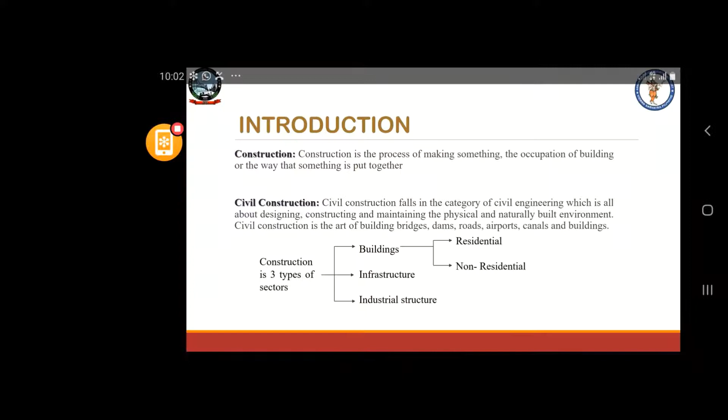Welcome to today's presentation on new trends in construction planning as well as technologies. My presentation is focusing completely on the technologies involved in construction, in the existing as well as future technologies.

Construction, as we know the definition, is the process of making something, the occupation of building, or the way something is put together. Majorly, civil construction includes the category of civil engineering, which is all about designing, constructing, and maintaining the physical and naturally built environment.

Construction is the art of building bridges, dams, roads, airports, canals, as well as buildings. Civil construction is three types of sectors, which includes buildings, infrastructure, industrial structures.

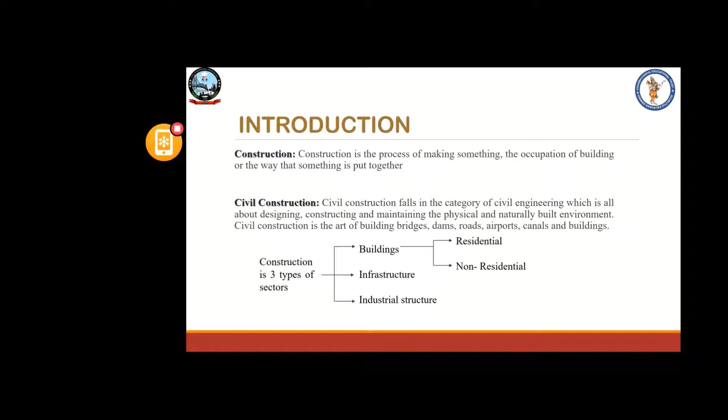Again, the buildings are subclassified as residential and non-residential constructions. It is also subclassified as residential buildings, light commercial construction, multi-family construction, that is apartment culture, healthcare construction, environmental constructions, industrial constructions, institutional construction, infrastructure project constructions, including roads, bridges, canals, highways.

The construction technology is basically defined as the study on methods of construction to successfully achieve the engineering design with recommended specifications. It also includes study of construction equipments and temporary works required to facilitate the construction process.

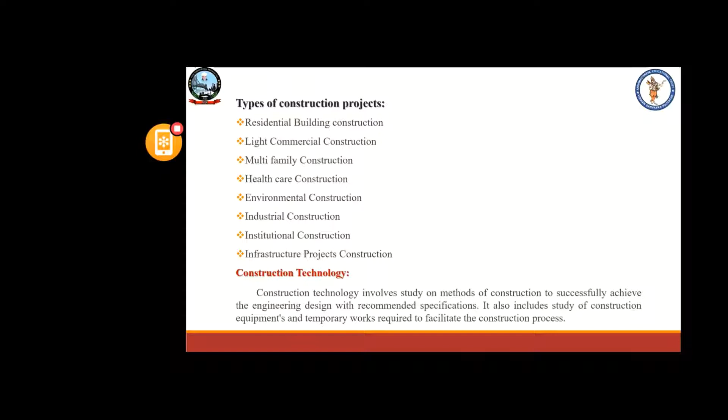See the history of construction technology. The Neolithic construction stage, that is New Stone Age, which is roughly from 9000 BC to 5000 BC, before Christ. The tools available were made from natural materials including bones, stones, wood, animal fibers, and the use of water. The first buildings were shelters, tents, and huts. It's built self-sufficiently using locally available materials, which has happened in the Stone Age, that is Neolithic construction.

Next stage is the Copper Age and Bronze Age, which came into use before 5000 BC, and bronze around 3100 BC. Although the times vary by region, copper and bronze were used for the same types of tools as stones such as axes, chisels, but new, less brittle, more durable materials.

Next stage is Iron Age construction, which is during 1200 BC to 50 BC, with the widespread use of iron for tools and weapons. In this period, by adding carbon, iron became steel, which was being produced after 300 BC. Steel can be hardened and tempered, producing a sharp, durable, cutting-edge technology.

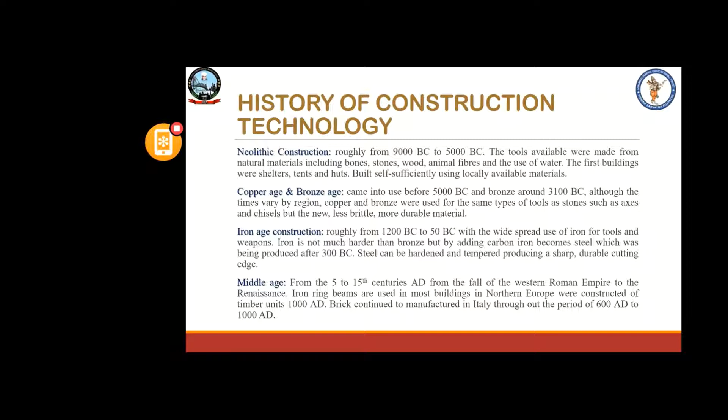Next, the Middle Ages, which is from 5th to 15th century AD, after the death of Christ. From the fall of the Western Roman Empire to the Renaissance, iron ring beams are used in most buildings. In Northern Europe, buildings were constructed of timber units until 1000 AD. Brick continued to be manufactured in Italy throughout the period of 600 AD to 1000.

The Renaissance stage started in Italy. The inventions of movable type and the reformations are taken. In the 17th century, that is called the birth of modern science. However, it was not until the 18th century that engineering theory developed sufficiently. Up to that, it was not professionally developed.

In the 18th century, it saw the development of many ideas that had been born. The architect and engineer became increasingly professionalized. Whereas in the 19th century, the Industrial Revolution took place. The Industrial Revolution was manifested in new kinds of transportation installations such as railways, canals, and macadam roads.

In the 20th century, elevators and cranes made high-rise buildings and skyscrapers possible. Other new technologies were prefabricated construction and computer-aided design. Whereas at the end of the 20th century, ecology, energy conservation, and sustainable development have become more important issues of construction.

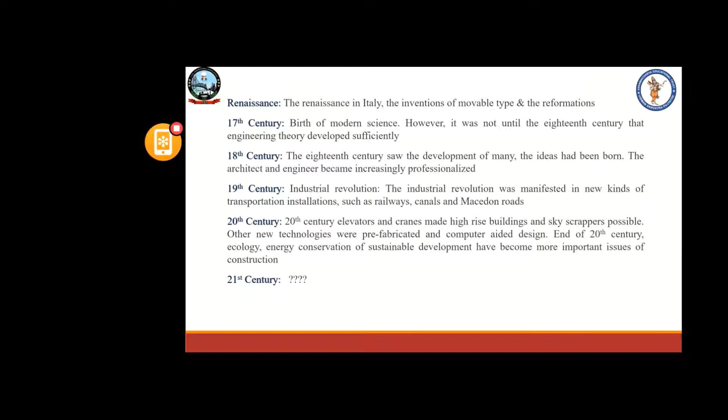The perspective on our construction industry in the 21st century, how are we doing, where are we? We are not up to the mark because when a project is sanctioned within a duration of 1 year, we are unable to complete it within 1 year. It is taking more than 1 year, it may go to 2 years or 3 years. There is a loss on the investor side as well as contractor side. The cost will be day by day increasing. So to arrest all these things, we have to see the alternatives, that is alternative technologies and emerging technologies.

And also you see the problems in the industry. The future state of our industry, how much we change to get there, and the role of innovation and new technology.

Why is construction very important? As all of you know, it is one of the first businesses. Virtually all other businesses rely on construction. People spend 90% of their time indoors, which has major impacts on health and well-being.

The total annual revenue is $10 trillion, whereas the added value is $3.6 trillion.

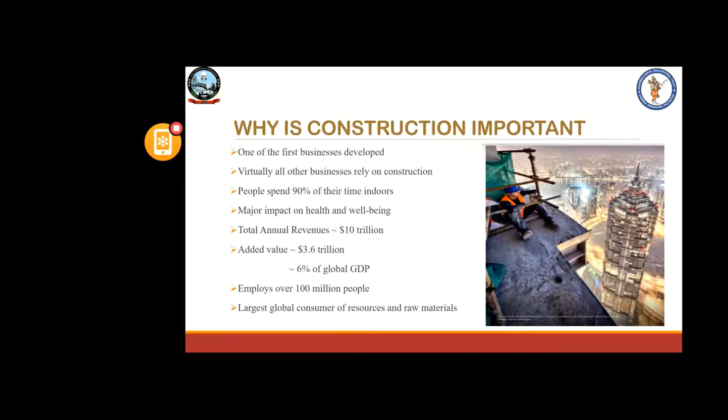The populations of urban areas are increasing by 2 lakhs people per day, so we'll need housing as well as infrastructure to accommodate this population. Our industry must transform, but our country is challenged.

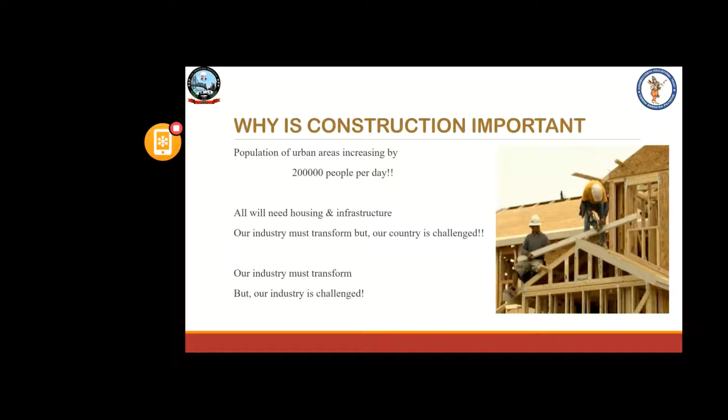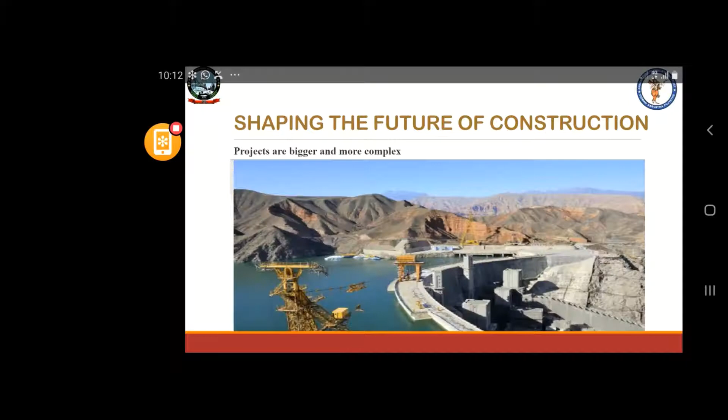Shaping the future of construction, the projects are bigger and more complex.

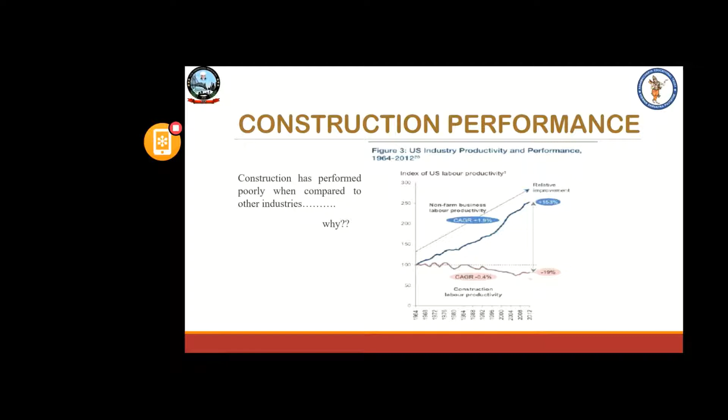Canada ranks among the top 10 countries in health and primary education, labor market efficiency, and financial market. The construction performance has also performed poorly when compared to other industries.

There are internal challenges. The industry must also confront internal challenges, which are lack of innovation and delayed adoption, informal process or insufficient rigor, and consistency in process execution.

Insufficient knowledge transfer from project to project, weak project monitoring, little cross-functional cooperation, little collaboration with suppliers, conservative company culture, and shortage of young talent and people development.

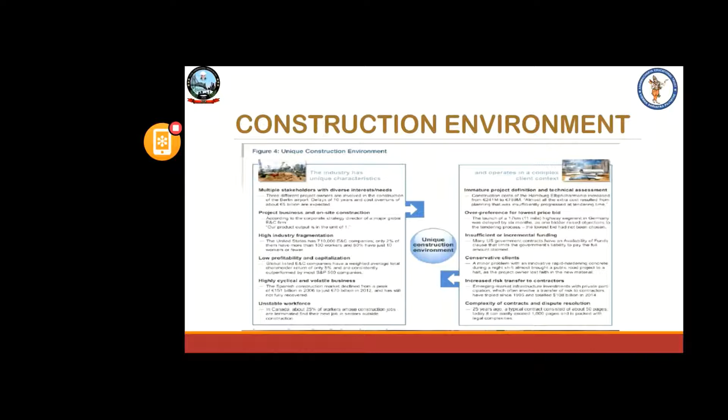So the construction environment includes a unique construction environment. The knowledge should be transferred from project to project.

How can we transform our industry? The transformation framework can include technological materials and tools, which is advanced building and finishing materials, smart materials - life cycle assessment should be increased.

The strategy and business model innovation, industry collaboration, process and operation, people organization and culture, joint industry marketing.

The transformation framework will also take place through regulation and policies, which are harmonized building codes or standards and efficient permit processes, and market openness to international firms and SMEs.

Promotion and funding of R&D, technology adoption and education. It also includes public procurement, actively managed and staged project pipelines with reliable funding,

strict implementation of transparency and anti-corruption standards, innovation-friendly whole life cycle procurements.

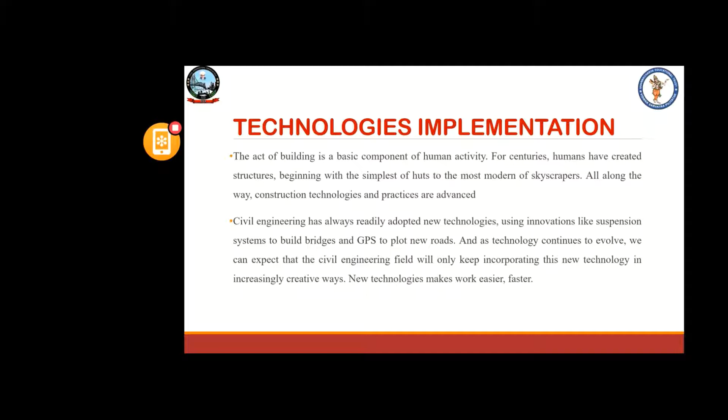The scope of these new technologies, these techniques, is sustainable with a wide range of applications, consumes very less time, and is durable. All these techniques involve use of alternative energy sources which are renewable, ease the construction work, and there is a lot of scope for the future. These techniques also use recycled materials to create new things, and can be used in places where humans cannot access, like dangerous places which are hazardous without man supervision.

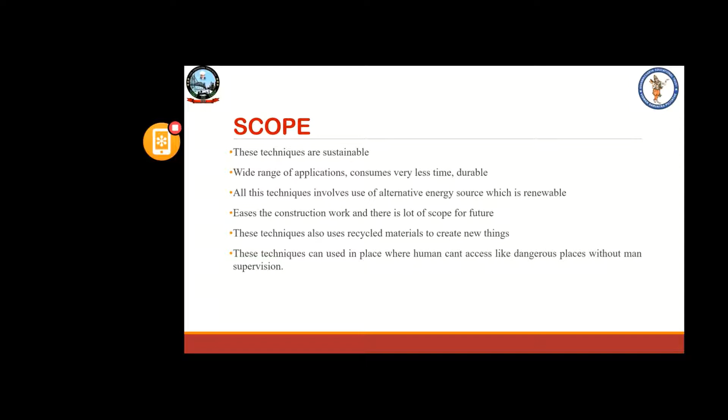The technologies include drones, which are UAVs, unmanned aerial vehicles. Civil engineering is ripe with applications for UAVs which can aid in scanning and mapping work sites, as well as capturing photos and videos for promotional purposes. This creates advanced mapping and scanning capacities for more accurate visualization.

UAVs often represent a cost-saving measure for businesses that need aerial mapping, as a drone does not require any pilot, but rather a programmer. UAVs are also easy to program to fly multiple times around the same work site, which means in the future firms will be able to capture a variety of images and videos while the project is being completed.

This will enable firms to better manage project progress. These UAVs will also revolutionize civil engineering through the use of photo scanning, an image capture process that uses photos rather than lasers to capture images. Photo scanning captures not just the ground surface, but also buildings, plants, branches, benches, and other nearby structures, and represents them in three-dimensional mode. With these advanced capabilities, drones will allow for more accurate and interactive 3D representation of civil engineering projects.

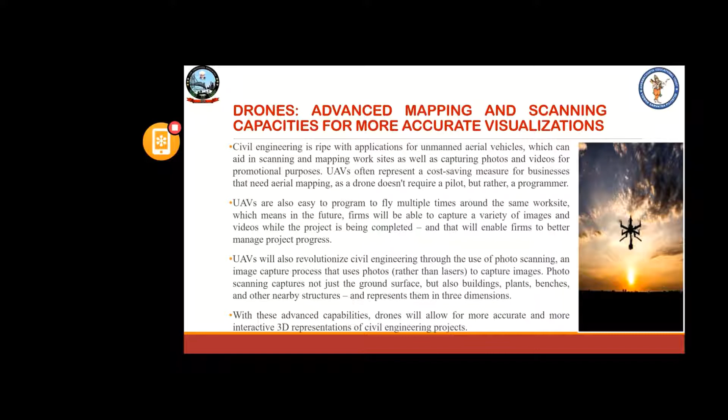Even with the trends of drones and robots, the UAV industry continues to grow. The FAA, the Federal Aviation Administration, a USA organization, predicts that 7 million drones will be required by 2020, for commercial applications in construction, earthworks management, location validation, project management, etc. New collaborations are also taking place.

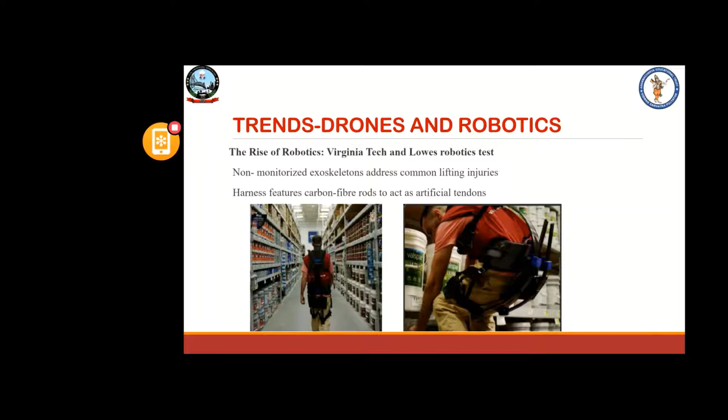The rise of robotics: Virginia Tech and Lowes robotics developed a non-motorized exoskeleton to address common lifting injuries. The harness features carbon fiber rods to act as artificial tendons, which can be used for this purpose.

A few more trends are in augmented and virtual reality. It's necessary to clarify the difference: virtual reality is an immersive experience, whereas augmented reality is information overlaid onto real-time visuals.

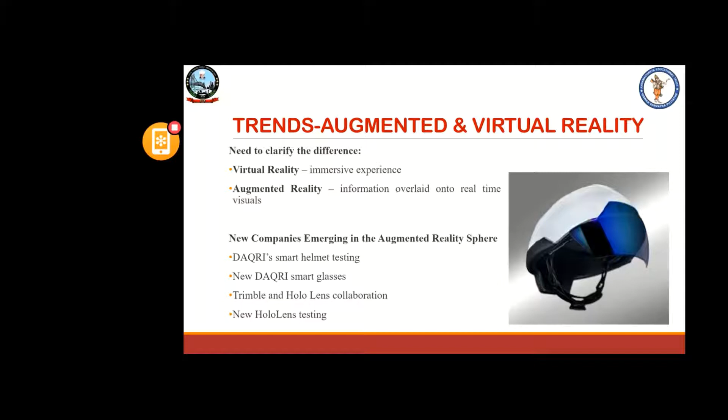Smart elements like smart glasses are manufactured by DAQRI, an American augmented reality company, for the safety of workers in the construction sector. The DAQRI smart helmet is being tested, along with glasses that can visualize virtual reality and augmented reality for employees. Microsoft HoloLens is another trend in augmented and virtual reality, also used for the safety of the worker and to visualize information.

Sensors are also an emerging technology for the health and safety of workers. A Life Band sends a signal through a mobile application if signs of mental fatigue are shown, by measuring brain activity. When a person is working, if any problem or fatigue occurs, it will immediately give an alarm through the sensors.

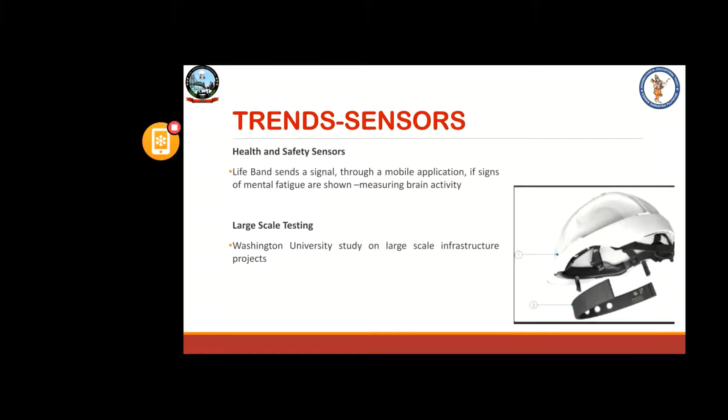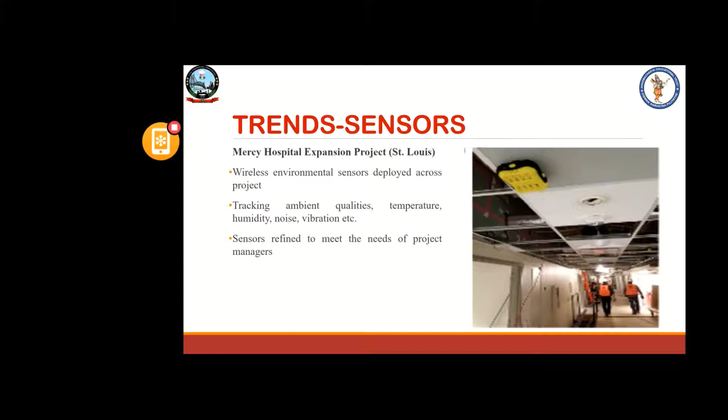Large scale testing, such as the Washington University study on large scale infrastructure projects, is where sensors are deployed, as you can see in this picture. Wireless environmental sensors are deployed across projects, tracking ambient quality such as temperature, humidity, noise, vibration, etc.

Safety sensors are also being used, with tracking technologies unveiling belt-mounted sensors to log workers' movement. Accelerometers and gyroscopes detect sudden falls or movement.

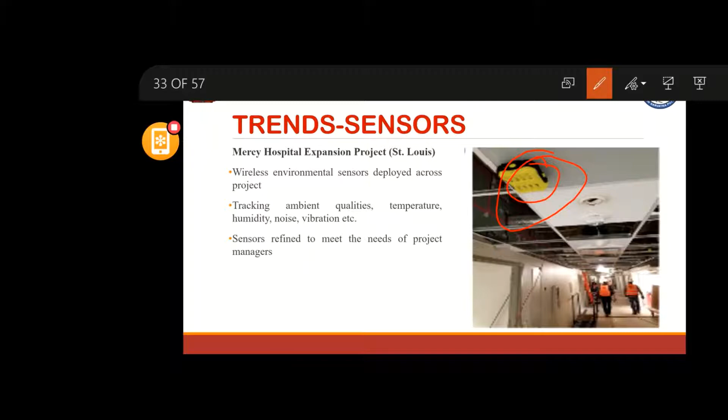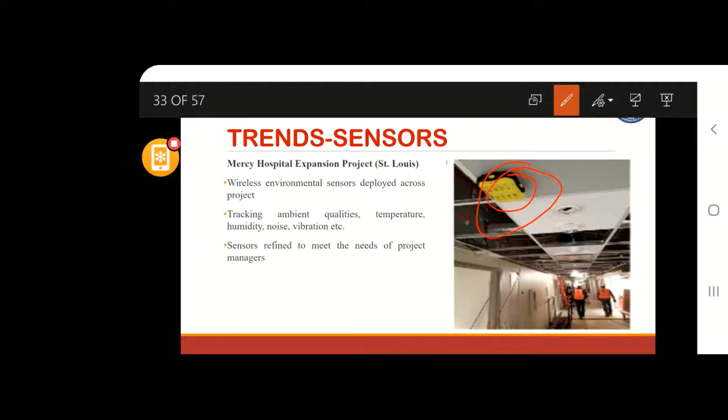You can see here this technology shown at Microsoft Build 2017, where sensors are used. When fatigue or any problem happens in the workplace, it immediately gives an alarm, providing a response to the people, which should also reach the managers.

Robot swarm construction can also be seen here. Termites can build large structures despite having no central supervision. Getting inspiration from this, researchers at Harvard University developed an initial design. Four-wheeled robots can build brick-like walls by lifting each brick and laying them in the required position, and they have sensors to sense other robots so they won't collide with each other.

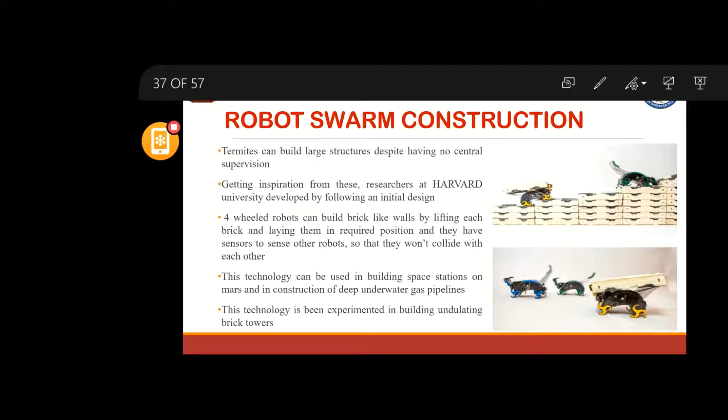This technology can be used in building space stations on the Mars planet and in construction of deep underwater gas pipelines. This technology is also being experimented with in building undulating brick towers.

One more technology is carbon nanotubes. A nanometer is one billionth of a meter. Using cutting edge techniques like electron beam spectrographic methods, engineers have created tubes of carbon with walls 1 nanometer thick. They have the highest strength-to-weight ratio of any material on earth and can be stretched to a million times longer than their thickness.

They are very light and strong, so they can be embedded into other building materials like metals, concrete, wood, and glass. This increases tensile strength also. A lot of research work is going on in monitoring stresses inside building materials and identifying potential fractures and cracks before they occur.

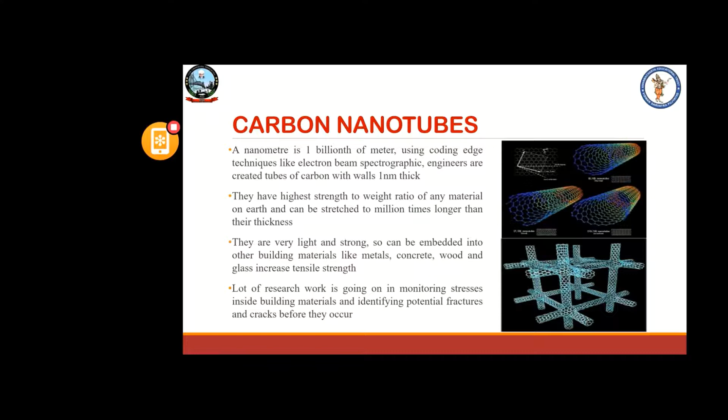The innovative construction material, which is self-healing concrete.

Concrete is the most widely used material on earth, second most used after water. But it is subjected to cracking, stresses, and deterioration under extreme heat and cold conditions. The only way to fix concrete was to patch it or reinforce it.

But in 2010, a graduate student and professor at Rhode Island created a new type of smart concrete that heals its own cracks. The concrete mix is embedded with tiny capsules of sodium silicate. When a crack forms, the capsules rupture and release a gel-like healing agent that hardens to fill the voids. Other researchers have used bacteria or embedded glass capillaries or polymer microcapsules to achieve similar results.

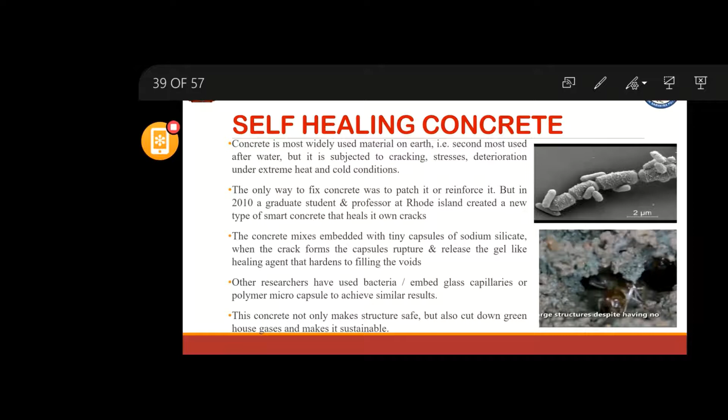This concrete not only makes structures safe, but also cuts down greenhouse gases and makes it sustainable, which is one of the innovative materials in construction.

Next is permeable roads. The permeable pavement, also known as pervious or porous concrete, is a specific type of pavement with high porosity that allows rainwater to pass through it into the ground below.

Through this movement, pervious concrete mimics the natural process that occurs on the ground surface, consequently reducing runoff and returning water to the underground aquifer. This is eco-friendly roads. It also traps suspended solids and pollutants, keeping them from polluting the water stream.

The pervious concrete has many applications, most commonly low volume pavements, residential roads and driveways, sidewalks, parking lots, low water bridges, well linings, swimming pool decks, etc.

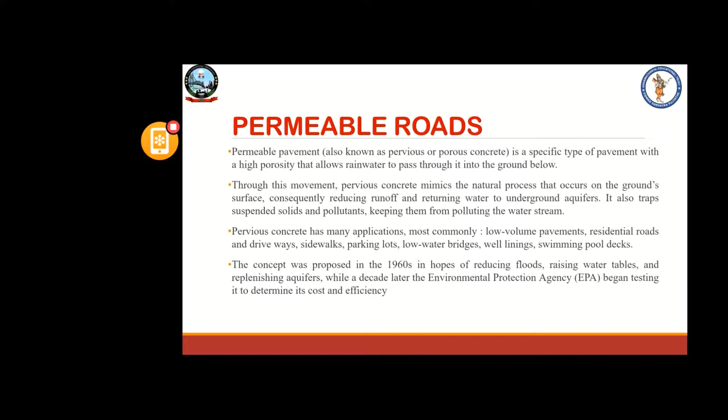The concept was proposed in the 1960s in hopes of reducing floods, raising water tables, and replenishing aquifers, while a decade later the Environmental Protection Agency began testing it to determine its cost and efficiency. So with these permeable roads, there is a huge saving of water in the groundwater aquifers.

The water and aggregate are added in specific amounts to attain pervious concrete with a high air content and just enough cementitious paste to coat particles and interconnect.

The low cement and high air content results in reduced strength, hindering pervious concrete from being used on highways, certain streets, or heavy loading areas.

You can see in the figure, the permeable paving can be one part of building green parking, which can also include rain gardens or trees, solar covers, and other creative elements.

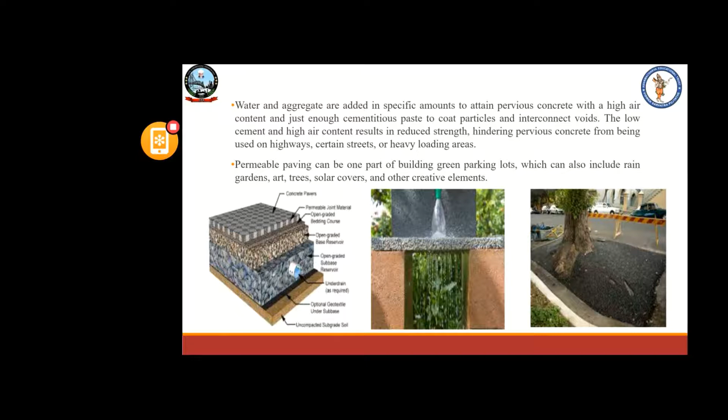One more technology is aerogel. The aerogel is a synthetic porous ultralight material derived from a gel in which the liquid component of the gel has been replaced with a gas.

The material is very suitable to limit the heat losses of buildings. Its melting temperature is 1200 degrees centigrade, and it dampens vibration and sound. Aerogel is the only compound with significant thermal insulation capabilities.

It is the least dense material on the earth, a foam-like material which held its shape despite being almost light as air.

Due to their translucent nature, they are nicknamed frozen smoke.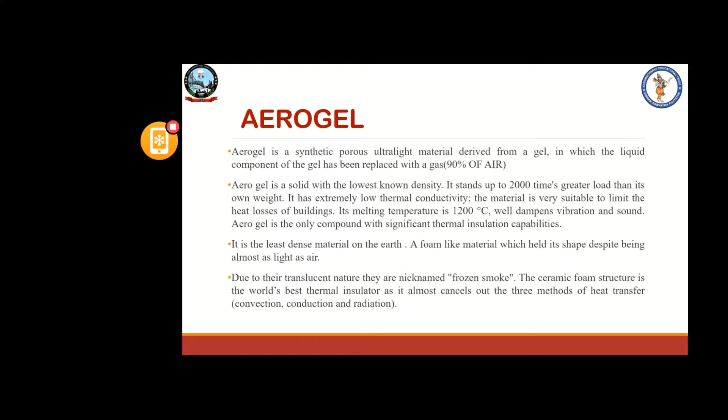The ceramic foam, that is the ceramic foam structure, is the world's best thermal insulator, as it almost cancels out the three methods of heat transfer, that is convection, conduction and radiation.

NASA used an aerogel to trap space dust particles aboard the Stardust spacecraft. The particles vaporize on impact with solids and pass through the gases, but can be trapped in aerogels.

NASA also used aerogel for the thermal insulation of the Mars rover and space suits. Aerogel concrete is also available, which is made from aerogel granulate, gypsum and cement, and can be used for foundry applications and structural panels. This is also one of the best products which can be used in modern construction.

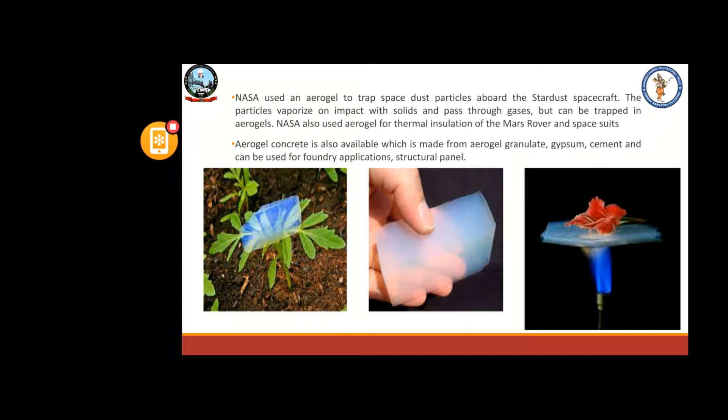The advancement in this 21st century is 3D printing. 3D printing means the action or process of making a physical object from a three-dimensional digital model, typically by laying down many thin layers of material in succession.

3D printers take data from a computer generated model and translate that into a real solid form. 3D printing is gaining a lot of ground, not just among hobbyists, but also business.

With 3D printers coming down in price each year, it is not long before we will see them used by civil engineers. 3D printing offers benefits for both design and construction, essentially tying the two processes together. It is easy to design custom construction supplies and then build them using nearly any kind of material imaginable. In fact, 3D printers are already in use in construction projects in Europe.

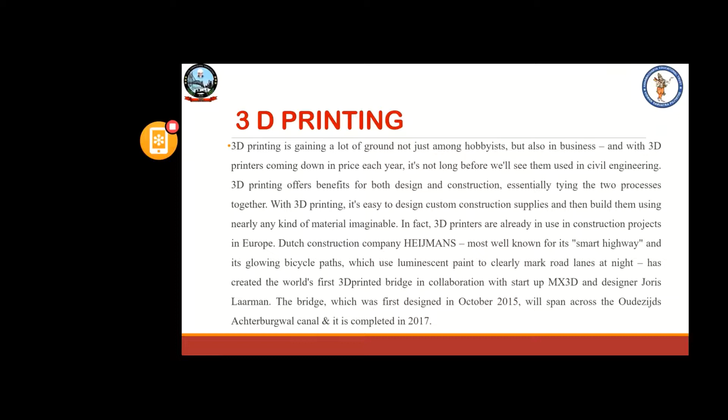The MX3D 3D printer is not like those we have traditionally seen. Rather than a desktop 3D printer, the MX3D technology consists of a set of large mechanical arms that hold a torch-like tool for welding. This robot arm builds 3D objects in an open warehouse space rather than inside a box as most 3D printers do. The arms can also print in all directions, unlike typical 3D printers, allowing for much more creativity and variability in the design stage.

Heijmans' innovation manager says that 3D printing joins design and construction into a single process rather than two separate processes, as has traditionally been seen in construction. Vander Ven notes that this change will require site managers and designers to start looking at the design process in a new way, which can speed up construction.

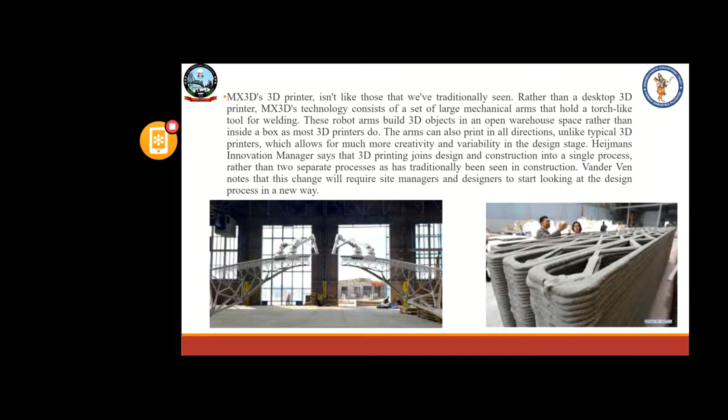The next construction technology is plastic roads, improving the durability and lifespan of our roads. Plastic is one of the most commonly recycled products, with plastic materials often being recycled into bottles, bags, toys, containers, and much more. But now a Dutch company is attempting to recycle plastic into something much larger: roads.

VolkerWessels is a Dutch construction firm preparing to build a plastic road in Rotterdam. While VolkerWessels' plastic road is still only a concept, it is becoming quite popular in Holland, where 96 million tons of carbon dioxide are released into the air through road building and maintenance alone. VolkerWessels expects that its plastic road will reduce greenhouse gas emissions while making roads stronger and increasing their lifespan.

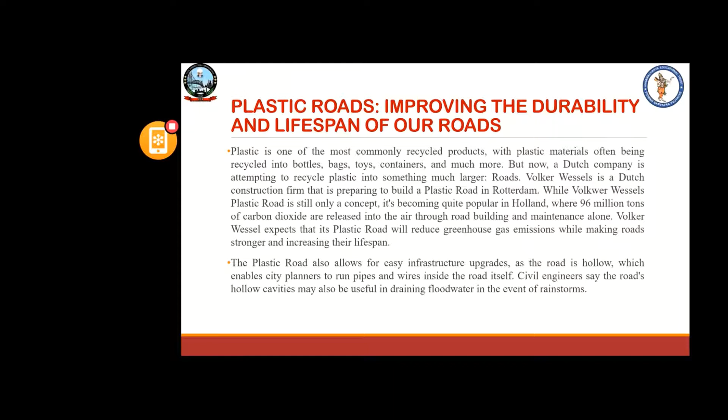The plastic road also allows for easy infrastructure upgrades, as the road is hollow, which enables city planners to run pipes and wires inside the road itself. Civil engineers say the road's hollow cavities may also be useful in draining flood water during rainstorms. So these plastic roads will also solve the problem of road lifespan as well as plastic pollution.

The next revolution is holographic computers. This next revolution in wearable technology is here, and it's going to forever change information management and communication processes in the civil engineering industry.

HoloLens is a mixed reality headset that layers 3D holograms over physical world images to convey helpful information to the wearer. Using the HoloLens, civil engineers can see digital input drawn over physical objects, share that input with collaborators via Skype, fine-tune designs in 3D, and explore designs in real time. Currently, businesses in the architecture and construction industries are piloting the HoloLens and developing innovative new processes that leverage 3D holographic models to improve the design phase.

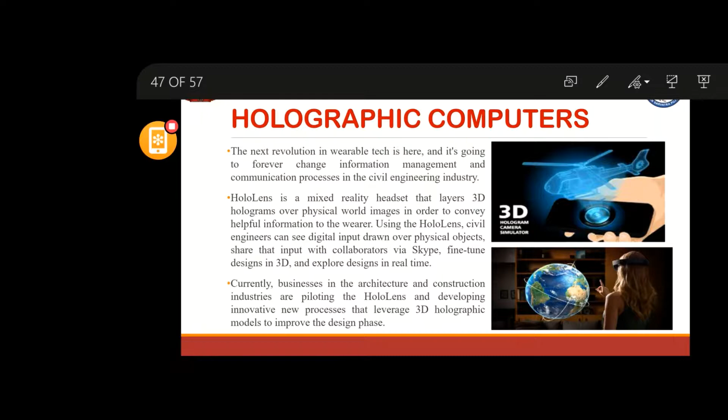Next are contactless security cards, which improve on RFID to boost security for workers. Site security is always a priority, and with technology evolving, site managers need more and more security measures at their disposal.

The next big thing in site security is contactless security cards. These cards can be programmed with individual profile information to uniquely identify each card holder and can give users secure access.

The great advantage that these smart cards offer is that security becomes much easier to manage. Employees can check themselves into and out of the work site with just a swipe of a card, giving managers a turnkey security solution that does not require their constant presence. The only disadvantage is that cards are most likely to be lost or stolen, and there is the possibility of hacking.

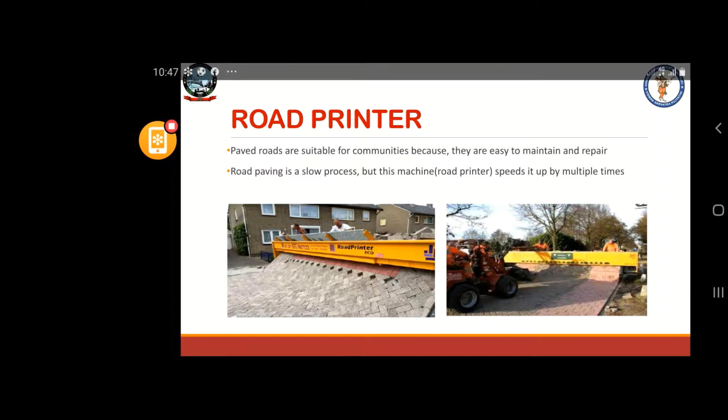The road printer paves roads that are suitable for communities because they are easy to maintain and repair. Road paving is normally a slow process, but this machine, the road printer, speeds it up by multiple times. So directly, you can save time and money by using these road printers.

Solar paint is another technology here. Solar panels are big and chunky, yet they are not that powerful. Companies are developing spray-on solar cells using nanoparticles of zinc and phosphorus. Solar paint, also known as paint-on solar or paintable solar, works the same as any other photovoltaic cell, collecting energy from sunlight and converting it to electricity.

So these are the main things - now roads are becoming sources of power generation. The basic idea is that billions of tiny pieces of light-sensitive material are suspended in a flexible liquid like an ink or paint, which can be sprayed onto various shapes and sizes. In 2014, researchers at the University of Toronto experimented with solar paint made of tiny dots known as colloidal quantum dots.

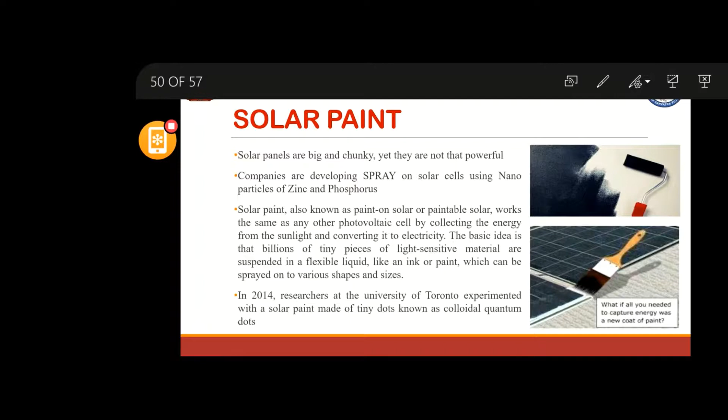From the building's point of view, the technology derived in the 21st century is the BIM model, that is Building Information Modeling, which is a 3D model. It is an intelligent 3D model based process that gives architecture, engineering, and construction (AEC) professionals the insight and tools to more efficiently plan, design, construct, and manage buildings and infrastructure.

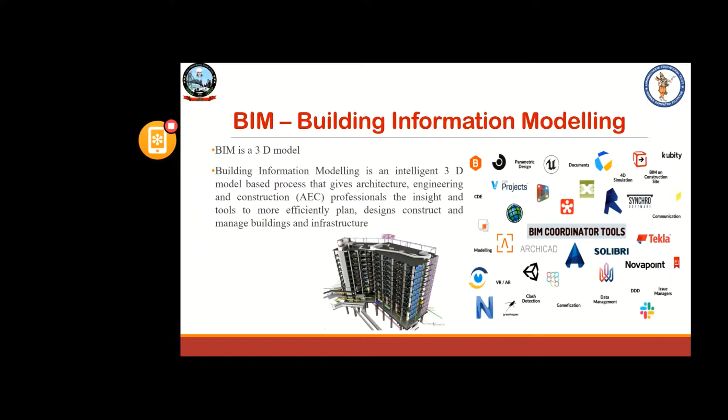The benefit of Building Information Modeling is it provides pre-construction project visualization. You can see at every point the 3D view, you can see the construction of the project.

Model-based cost estimation includes cost estimation in the design itself. There is no need to use two separate methods, that is designing in one software like StaadPro and estimation in another like Primavera. It's a combination you can use in this one model. It is an integrated model for both design and cost estimation.

It provides improved coordination and visualization in design. There is a high level of customization and flexibility, easy maintenance of the building life cycle, and better project quality. So all these are key features of BIM modeling.

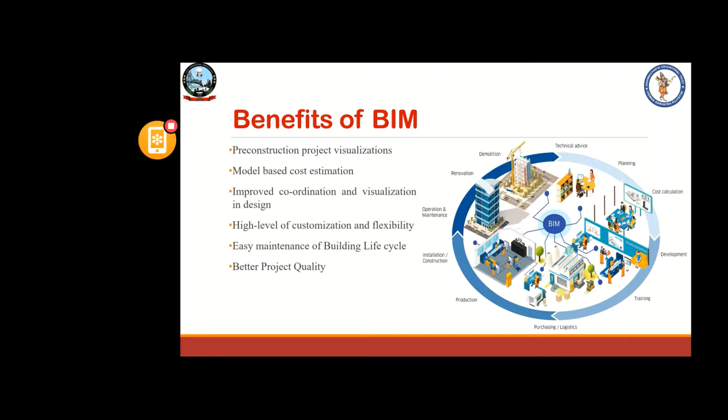The advantage of all these technologies is that most of them are sustainable, with very less carbon emissions. All these technologies use alternative energy sources which are mostly renewable. These technologies ease construction work, making it very fast and long lasting.

Robot swarm technology can be used in places where access for manpower is difficult. Smart concrete, that is self-healing and permeable concrete, reduces waterlogging problems, runoff problems, and the problem of repairs. Aerogel is an energy efficient, wonderful material which can be a future construction building material.

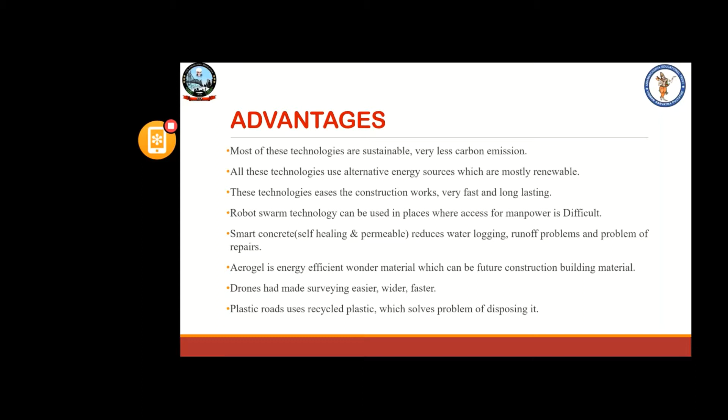Drones have made surveying much easier, wider, and faster. Plastic roads use recycled plastic, which solves the problem of disposal.

A few disadvantages are there with these technologies that should be overcome through advanced research. As these technologies are new and not widely used, the cost is also high, and they require skilled labor to implement them.

The primary disadvantage for drone use in civil engineering is the initial and capital expense required to purchase drones and train pilots, that is programmers. However, the cost is expected to decline over time.

3D printers are limited in the kinds of materials they can print. They also pose a threat to manufacturing jobs, and training staff to use them may require significant capital investment. Recently, with these 3D printers, not only cement and additives like polycarbonate, but even concrete is being used, overcoming the material problem, but the issue of manufacturing jobs and staff training remains.

The road's components are also somewhat volatile, and exposure to chlorine will cause the road to give off hydrogen chloride, a colorless gas that, when exposed to atmospheric humidity, turns into hydrochloric acid. When it becomes sufficiently concentrated, hydrochloric acid forms an acidic mist that can cause irreversible damage to human tissue.

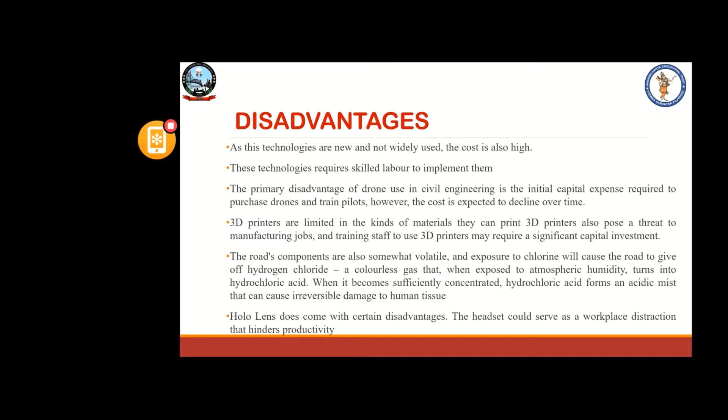Here are a few more innovations in construction. The world's first sideways moving elevators were unveiled in Germany. Exoskeleton suits promise lower fatigue and higher production for construction workers. The world's first 3D printed bridge officially opened in Madrid in Spain.

France officially unveiled the world's first solar panel road. Self-driving track loaders are used on construction sites. 3D concrete printers can print structures in less than a day.

That's what we discussed - the Tesla solar roof shingles, one of 8 green building products embodying the green concept, which is also one of the revolutions of the 21st century. All is going green.

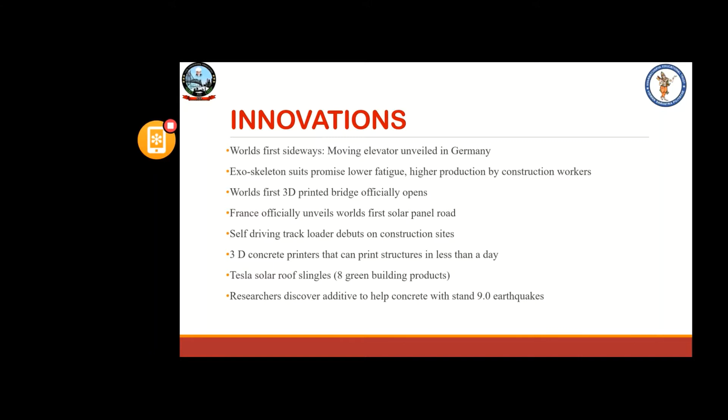Researchers discovered an additive to help concrete withstand a magnitude 9.0 earthquake. Microsoft is targeting construction trades with a new mixed reality hard hat accessory for worker safety.

Colorado DOT tested the world's first self-driving construction vehicles. At the work site, these vehicles travel without a worker - it is self-driving without collisions. The construction applications are integrating with each other.

New hard hat attachment sensors detect when workers are fatigued.

Finally, Massachusetts Institute of Technology researchers designed a material which is 10 times the strength of steel by changing the geometrical configuration from two dimension to three dimension, research conducted by professors Markus Buehler, Zhao Qin, and Gang Seob Jung.